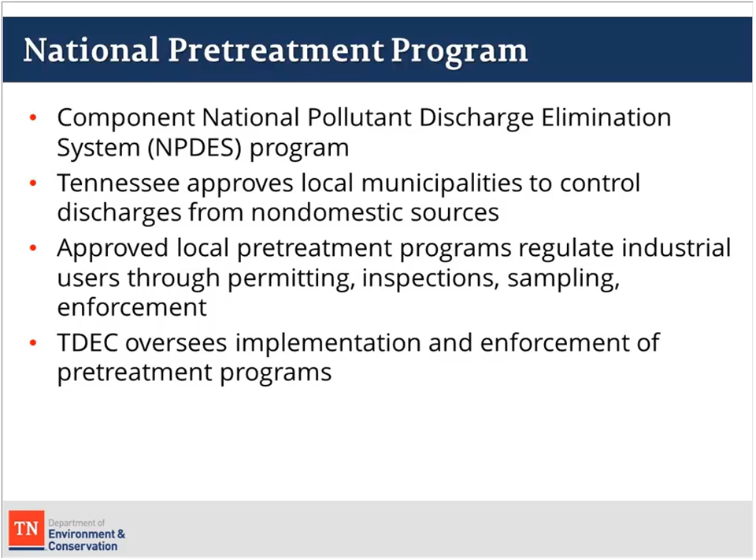So the National Pretreatment Program is a component of the National Pollutant Discharge Elimination System, or NPDES program for short. So in Tennessee, TDEC approves the local municipalities to control discharges from non-domestic sources, such as industrial sources. And then those approved local programs then regulate the industrial users through permitting, inspections, sampling, and enforcement. So TDEC's role here is really to oversee that implementation and enforcement of those local pretreatment programs.

So the objectives of the pretreatment program are to prevent the introduction of pollutants into publicly owned treatment works, or POTWs, that can interfere, pass through, or otherwise be incompatible with the treatment works. And then we also want to be able to improve opportunities to recycle and reclaim wastewaters and sludges and protect the infrastructure and workers at that publicly owned treatment works.

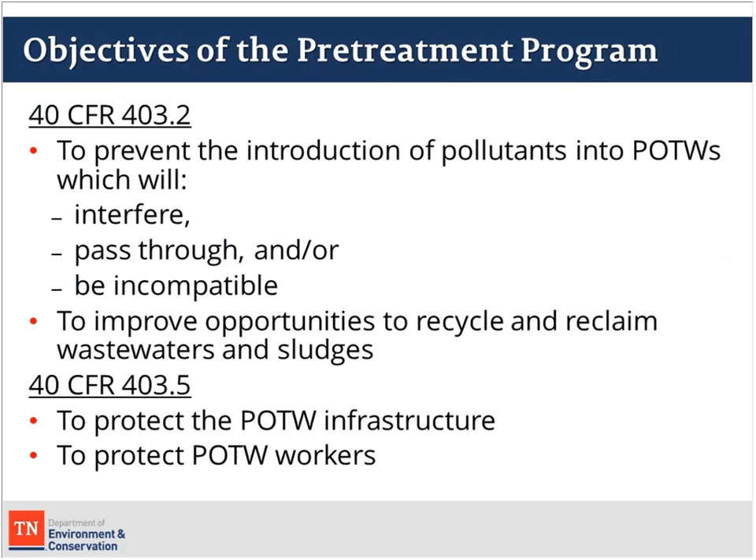So I like to show this picture to anybody when I'm introducing them to pretreatment because it does a good job of kind of showing where things can go wrong. You've got the industries up in the left, the collection system going into the wastewater treatment plant, and the receiving stream down in the bottom right.

So you can have issues in the collection system due to corrosion. You could have explosions. At the plant itself or in the collection system, you can have injury to workers from hazardous fumes. We're also concerned with interference with the biological activity at that wastewater treatment facility. We don't want pollutants passing through into our surface waters in the state. And we don't want limitations on sludge disposal or more expensive options because of pollutants.

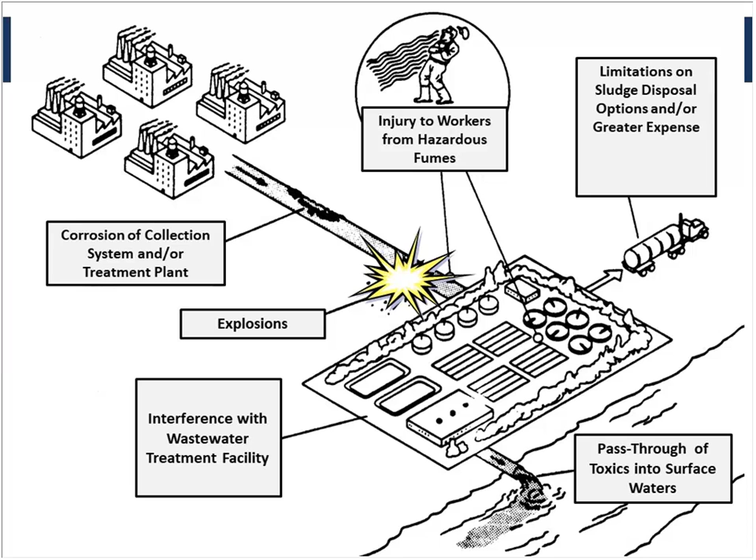So here's the hierarchy, in Tennessee at least. The industries report to the municipalities or utilities with approved pretreatment programs. These are also known as the control authorities. The control authorities then report to TDEC, and TDEC is the approval authority in this case. And then at TDEC, we report directly to EPA.

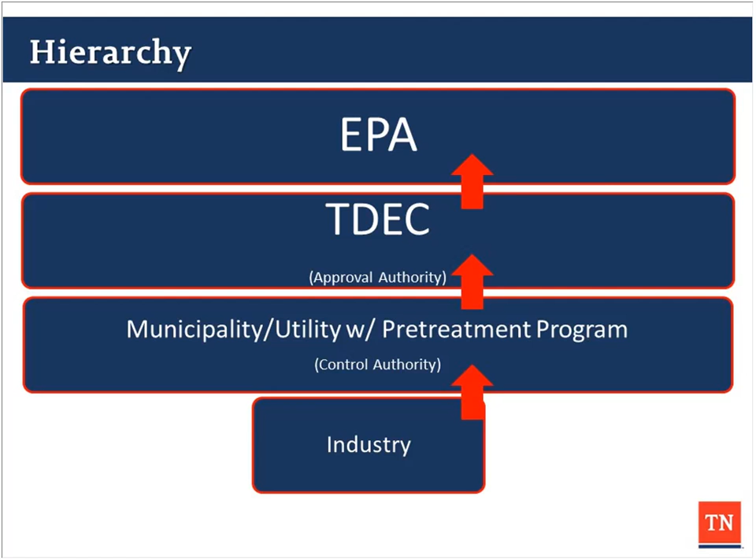So in Tennessee, we have 101 active pretreatment programs ranging all the way from Memphis to Bristol, and around 700 permitted significant industrial users discharging to those pretreatment programs. Out of those roughly 700 users, close to half of them are subject to federal categorical pretreatment standards.

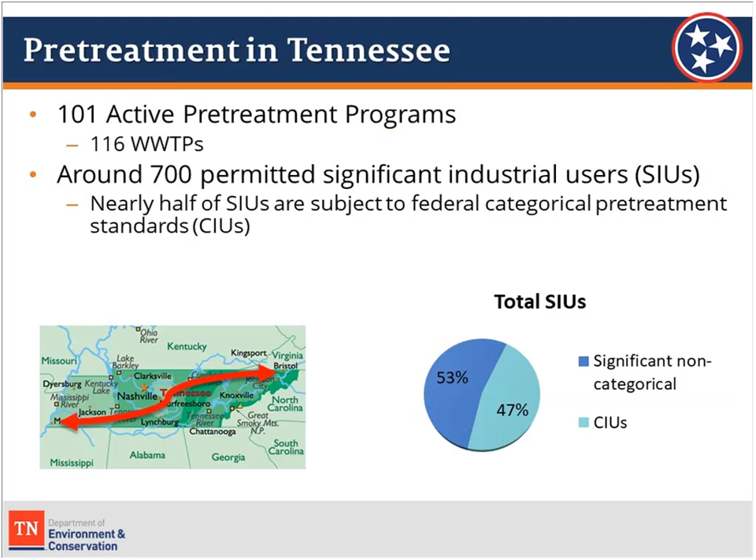So one of the big things TDEC does as the approval authority is inspections. We'll do pretreatment audits, pretreatment compliance inspections, and technical assistance visits. So these generally consist of kind of lengthy interview/questionnaire portions where we ask the pretreatment coordinator a lot of questions about the program. We also do a file review, so we're going to look at the industrial user permits, reports, any enforcement actions, correspondence, the inspection forms.

And then we also do oversight inspections at a portion of the industries that are permitted by the local control authorities. So it's really important to point out that these audits and inspections that TDEC does are of the control authorities. We are not directly auditing or inspecting the industries themselves.

So this is just an overview of our inspection cycle. We do audits once every 5 years. Those are generally led by somebody out of the Nashville Central Office. And then pretreatment compliance inspections and technical assistance visits are done twice every 5 years, kind of back and forth, PCI, TAV, PCI, TAV. And those are usually led by somebody out of a TDEC field office.

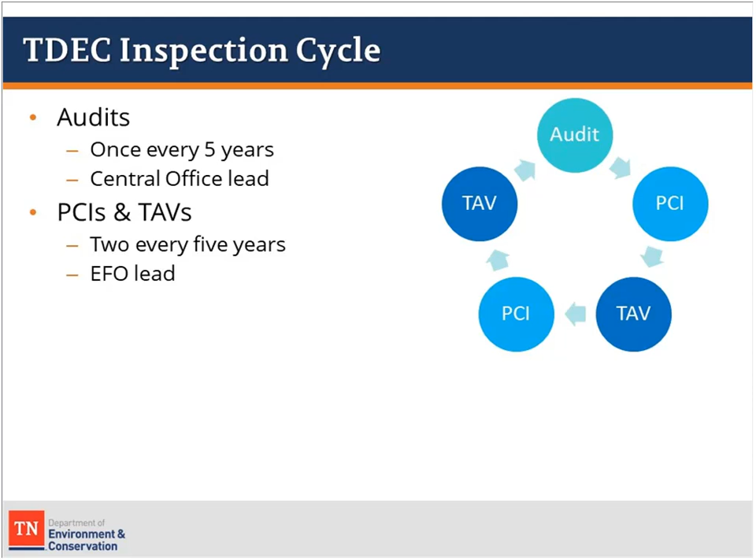So apart from the inspections, TDEC staff also does a lot of review of submittals and program modifications from the approved programs. So some examples of those reviews that we do are the local limits calculations to determine the limits that are given to the industries, legal authorities such as sewer use ordinances, and industrial waste surveys.

We also review pretreatment semi-annual reports and annual reports from the control authorities, and we provide a lot of technical assistance and training to the regulated community. We do initiate enforcement action as needed, and then of course we report to EPA. So that is all I have for my very quick overview of TDEC's role.

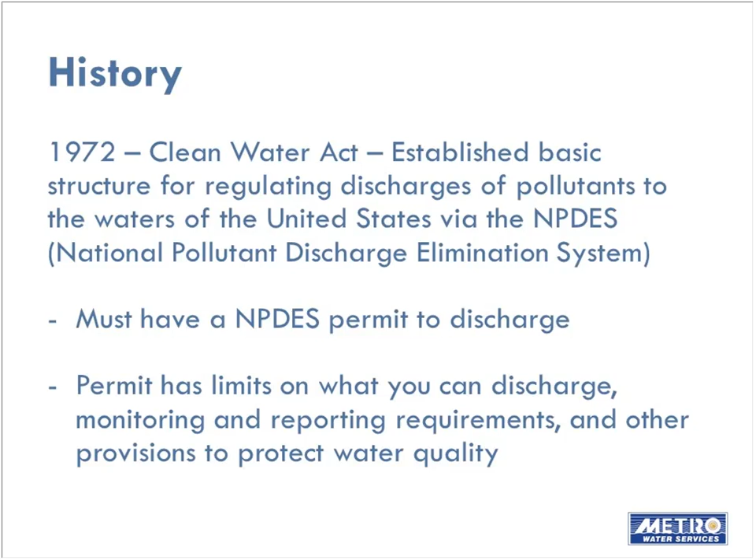So in 1972, the Clean Water Act established the NPDES system. As Laurel mentioned, this is the system that permits wastewater treatment plants, among other things, and limits what pollutants we may discharge to the waters of the U.S. In order to protect these plants from potential industrial pollutants, in 1973, 40 CFR 128, that's 40 Code of Federal Regulations 128, set up the initial pretreatment standards.

In 1978, they were replaced by 40 CFR 403, which are pretty much the pretreatment standards we have today, with a number of modifications over the years. In 2005, there was the pretreatment streamlining, which attempted to relieve the burden on both you, the industrial user, and us, the control authority, and still have an effective program.

So what are we trying to accomplish in a pretreatment program? Prevention of pass-through, prevention of interference, protection of quality of municipal sludge, and protection of workers. Pass-through, you keep hearing that, and you will keep hearing that. Basically, any pollutant that comes from an industrial or other source, enters the treatment plant, passes through it and causes a violation, that is a pass-through. Interference, any pollutant that enters the treatment plant and disrupts its biological process in some way and causes a violation at the effluent, that is interference.

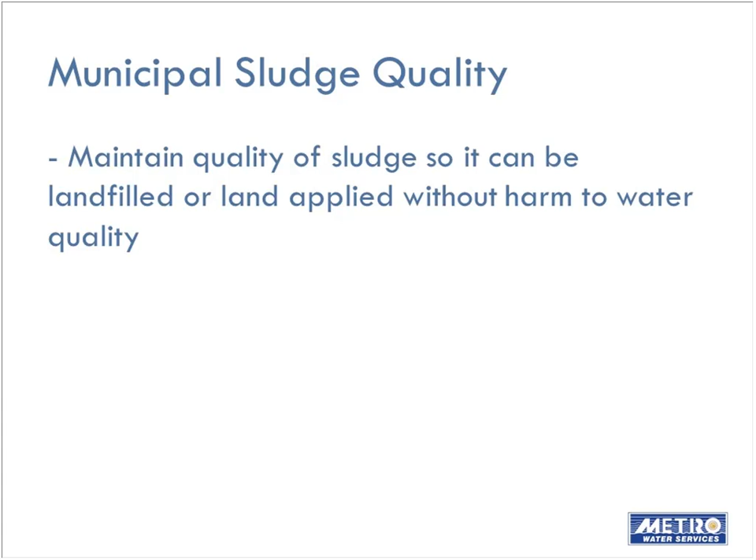Municipal sludge quality, obviously we want to be able to reuse the sludge for land application, or in a worst case scenario, maybe landfill it. So we do want to make sure that whenever that is disposed of or land applied, it does not contaminate the groundwater. And worker safety, if you are working downstream of an industrial facility, you don't want to have to worry about fumes that might be harmful to you.

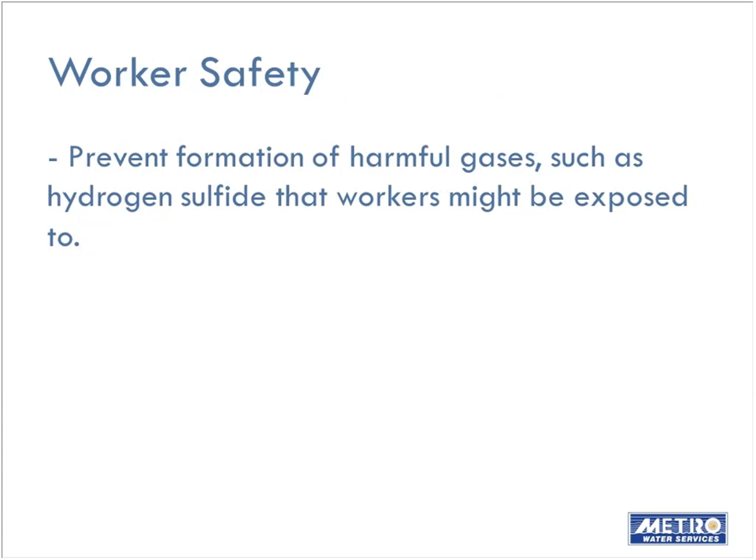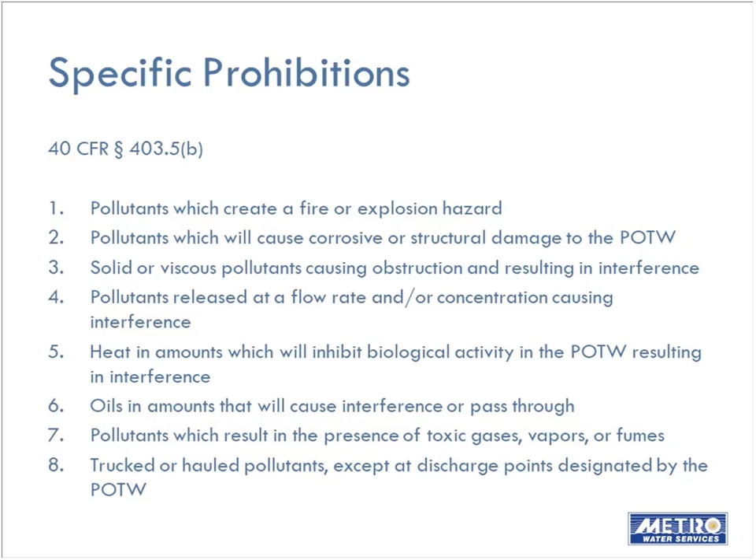So there are 4 types of pretreatment standards: general prohibitions, specific prohibitions, categorical standards, and local limits. General prohibitions, there we go again with pass-through and interference. User may not cause those. Specific prohibitions, if you've been paying attention so far and with a little bit of common sense, most of these should not surprise you. Fire, explosive, corrosive, things that stop up the sewer, etc. I'll point out number 7, presence of toxic gas. That one is there specifically for worker safety.

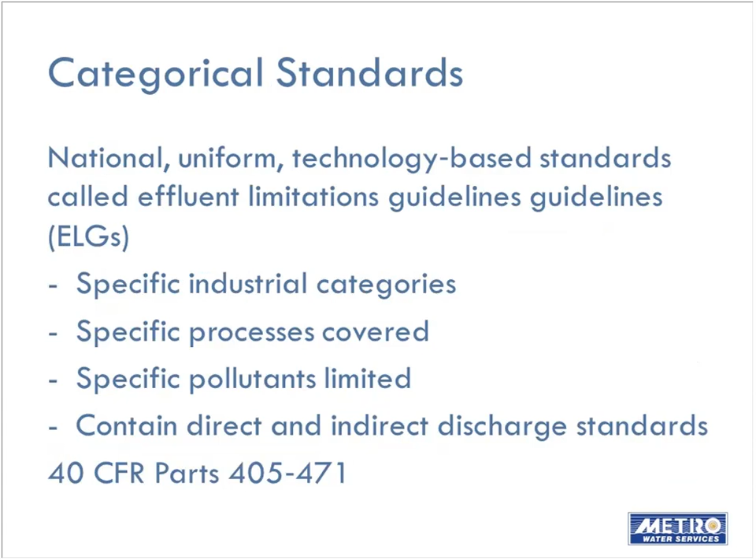And local limits, these are established by the control authority. What we do is we get background information via sampling of non-industrial sources, domestic or commercial, to find out what pollutants are coming into our POTW, our treatment plant. We also see what the levels of pollutants are at the treatment plant, both of the influent and the effluent, so we can see how much of the pollutant we are removing.

We include a safety factor, having some room for error there. We consider worker safety, and we come up with a number for each industry to meet that will allow us to meet our limits.

So who do we regulate? We regulate all SIUs, significant industrial users. If you discharge over 25,000 gallons per day of process wastewater, you are a significant industrial user. Also, if you contribute 5% or more of the hydraulic or organic loading to a treatment plant, and the catch-all, anything that the control authority has reason to believe might cause pass-through or interference. And I think I missed at the beginning, we include all categorical industrial users, that standard we just previously referenced, as SIUs.

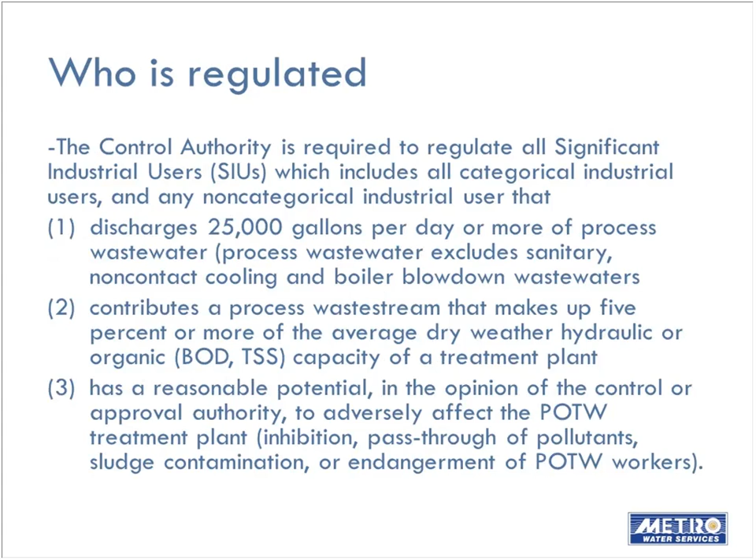So what do we have to do to get our job done? We do annual inspections. We maintain a compliance monitoring database of sampling that both we do and you are required to do. We issue notices of violations when necessary. We enforce based on our enforcement response plan. And we develop those local limits we were just talking about.

So what's our primary tool in doing that? That is the industrial wastewater discharge permit. Depending on your control authority, you'll generally get to fill out a new application every 3 to 5 years. In Nashville, it's 3. I don't think it can be any less than every 5 years. This permit is going to identify who you are, provide you with the local limits, and if categorical limits apply to you, it will provide those as well. And you are expected to meet whichever of the two numbers is more stringent.

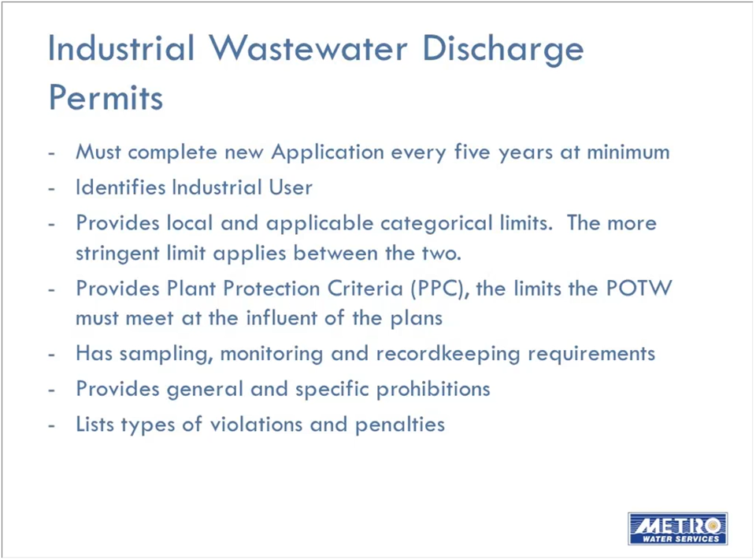We'll also give you the limits that we're supposed to meet at our plant, give you your sampling requirements, and once again provide those general and specific prohibitions. Tell you a little bit more about what violations and penalties you might be subject to. And from here on out, we're going to be going more into detail about what we've covered on these last 2 slides.

Inspections. So, one thing about our annual inspection that you should understand, it is not primarily a compliance inspection. That could happen if you're having problems. But when we're showing up for our once-a-year visit, that is not our intent.

We're trying to, and I am skipping ahead, so I'm going to back up now. Again. Okay.

So we're trying to get to know you and get familiar with your process, check the accuracy of your application, and just make sure that we have a working relationship with you, that we know who to talk to, you know who to ask questions of, and you know what to expect from us. And I should mention that Laurel mentioned that they do inspections too. So sometimes they will be accompanying us on our inspection. And as she said, they are not looking at you. They are looking at us at that point.

So if you get along well with your inspector and you want to watch them squirm a little bit, whenever we show up and we have someone with the state with us, you can say things like, now who are you again? And what is it you do? I've never seen you before in my life. And at this point, we'll be really concerned about what the state might say. So if you want to continue getting along with us, let Laurel and her colleagues in on the joke at that point.

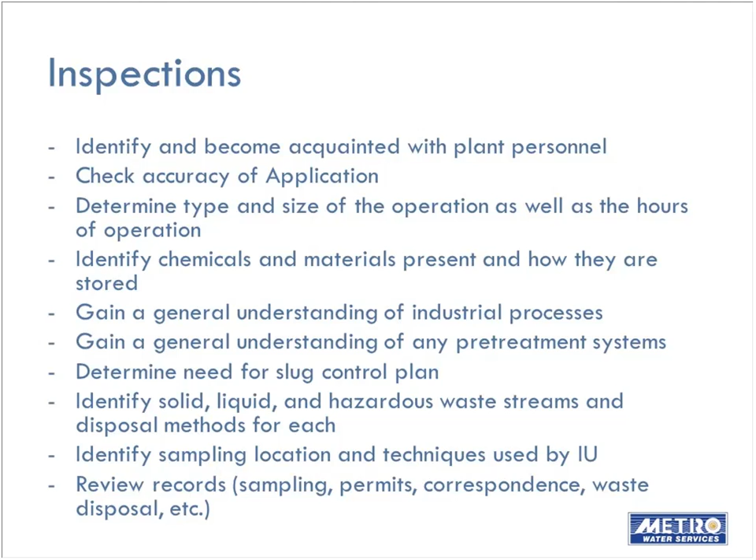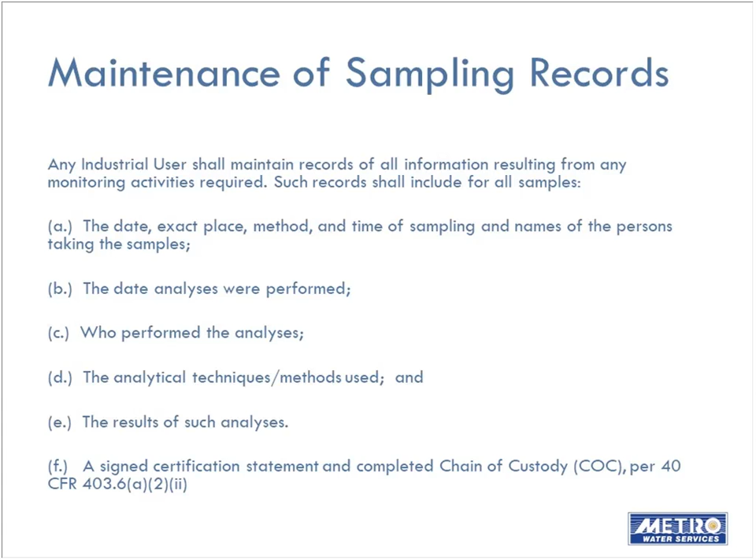I'll mention briefly the signed certification statement, and Kim's going to talk about that more as well. But one part of that is basically you are stating that the analysis that you are providing to us is representative of your process. Which means in order to accomplish that, sample dates should be chosen at random on a day of normal operation. We had one facility, we noticed that their numbers were always much lower than the numbers that we got. And we asked them about that, and they straight up said, well, we noticed that all the numbers you get are bad, so we don't sample on those days. So that is not a representative sample.

Also, do not choose a sampling date based on what processes are occurring. If you are Coca-Cola, don't schedule all sampling on days that you are producing Diet Coke. Spread it around, etc. Don't consistently sample on the same date each month or the same day each week. Had another similar conversation with an industrial facility. Their numbers weren't necessarily good or bad, but they always had the same numbers, and our numbers were pretty highly varied. They were sampling on the 10th of each month. So we got them to fix that, and we were getting good data.

And be particularly aware, you don't get into the criminal area too much with us. One exception is falsification. So make sure that when you are certifying that's the result, that is an accurate statement.

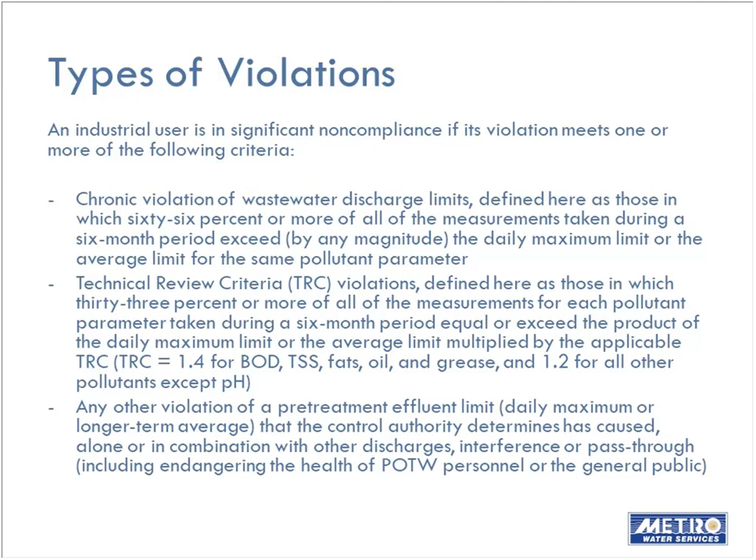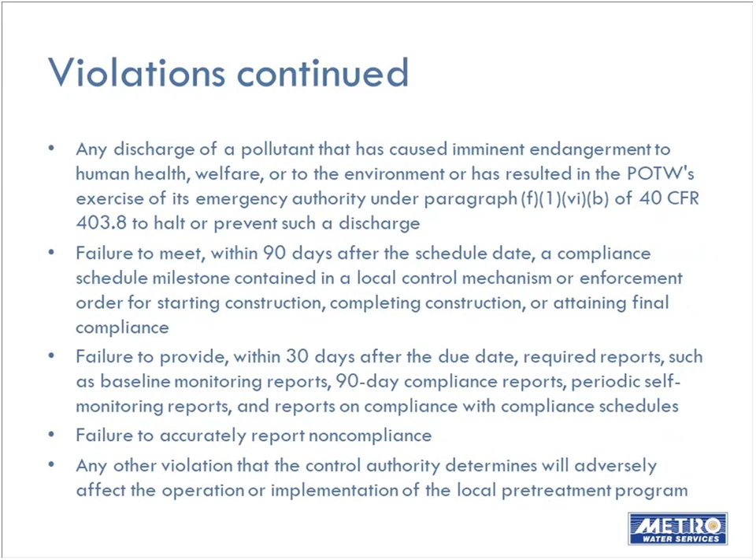Non-significant violations are basically small ones. You're slightly out once in a great while, you're a few days late on a report, you have a spill but it doesn't cause a problem, these sorts of things. So what happens whenever a violation occurs? We will send you a notice of violation. This is typical language; this is our specific language. I expect most people have similar language when we send an NOV.

So basically, respond back within 10 days. Fix the problem within 45 days. If you're unable to fix the problem within 45 days, give us a schedule of when you will fix the problem and why it's taking you whatever period of time it will take you. And that is a type of compliance schedule.

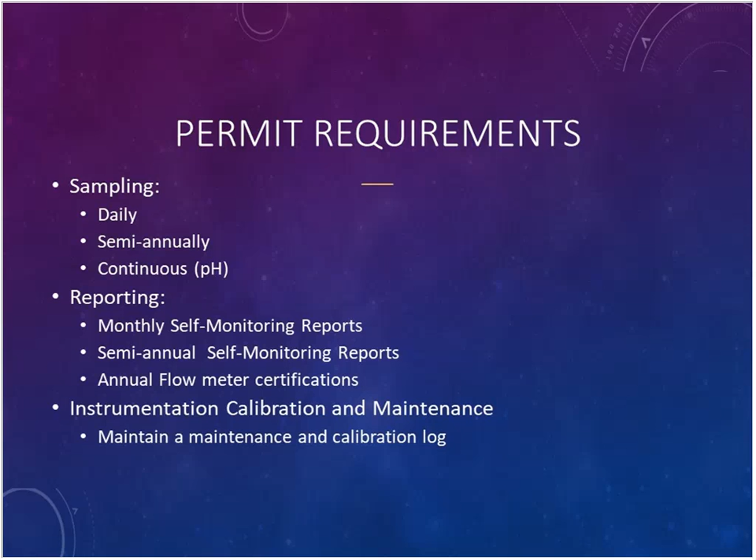And with this, what I want to say is use your other environmental compliance plans that you may have already developed, your SPCC plan or your stormwater plans, operating procedures. Those should all take into consideration accidental leaks and spills and discharges to the sewers. So use those to develop and implement this discharge plan.

If you do have a slug or an accidental discharge, immediately notify your control authority. For us, we also then have to do a written notice within 5 days. So make sure that that's all documented and kept on site.

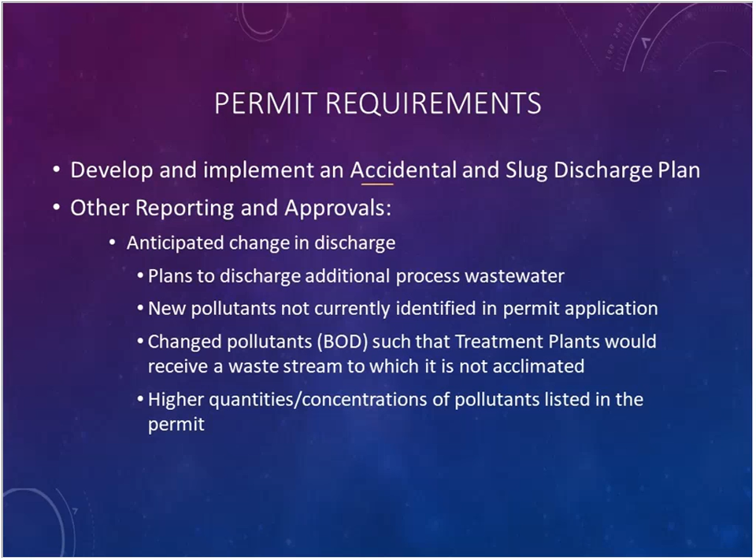Next slide, please, Caleb.

All right, we're there. Okay, so this one does definitely follow in with what Andy was talking about regarding notifications of violations. If you know that you have an exceedance, we notify both the main office and the control room of the treatment plant within 24 hours of becoming aware of the violation. So we call the control room to let them know, maybe we had a high concentration of pollutant X, and, depending on when you get your sampling results back, it may have been a few days ago, but they can look to see if there were any upsets at the system at that time.

Also, if it's a slug and you notify immediately, they can prepare in advance for what's coming so that they can properly treat it. We need to do written follow-up within 5 days from our initial notification of when we became aware of the violation. And then, as Andy said, once you receive a written violation from the control authority, you're going to have additional follow-up action items to submit back.

For us, and I have a letter pulled up here, we have 30 days to submit a report that talks about what happened to cause the violation, what steps we're taking to ensure that we're going back into compliance. We must do sampling to show that we did return to compliance, and if we can't achieve compliance, then we have to call and talk to the control authority and come up with compliance plans, things like that.

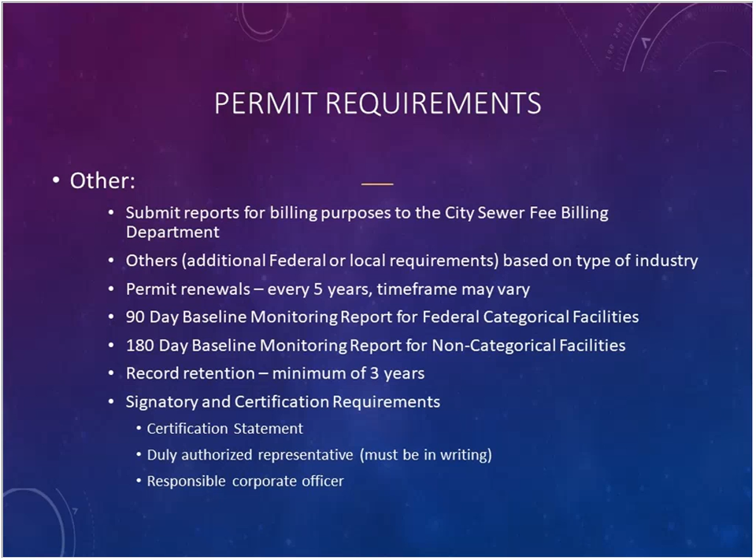Next slide, please, Caleb. Okie dokie. Okay.

So when Vaughn asked me to do this presentation, we talked about sustainability and different projects and maybe what we've worked on. Here at the Memphis site, we've completed one water conservation project where we added some controls and we're reducing the amount of water being used. And for us, there was a positive impact on our discharge to the city because we're not then discharging as much as we were. And since we pay fees on how much we discharge, that was a cost savings to us. But it wasn't such a high volume where we felt that our permit was going to be impacted because we have concentration versus mass.

But what I want to focus on is whenever you do sustainability projects or expansions or just anything, you need to notify and contact the control authority in the early stages of the project and then keep them updated on the status of the project. Communication is a key foundation in building the relationship with the regulatory agency, and that's really critical to get these projects going and just have a good working relationship with them.